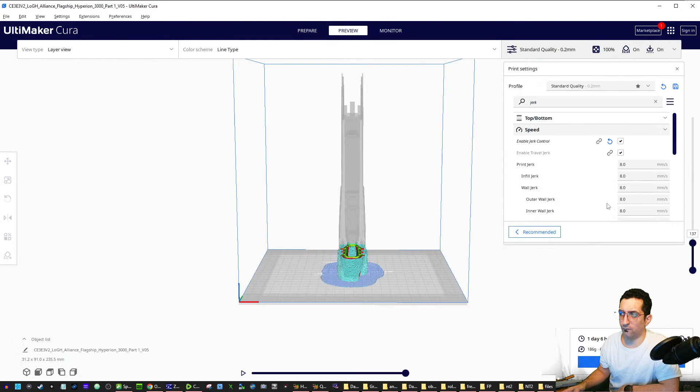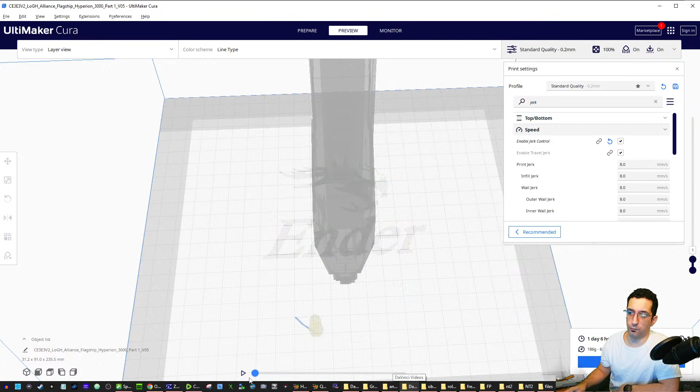So for our very first layer, our printer bed is basically the paper in an old school plotter. You can see it's moving forwards and back on the y-axis. If we zoom in, we see the nozzle, which instead of being a crayon or pencil, is a nozzle with melted material coming out a tiny hole. What's going on is the bed moves away from the nozzle, then towards it as it continues moving right, which is why the nozzle looks like it's going backwards.

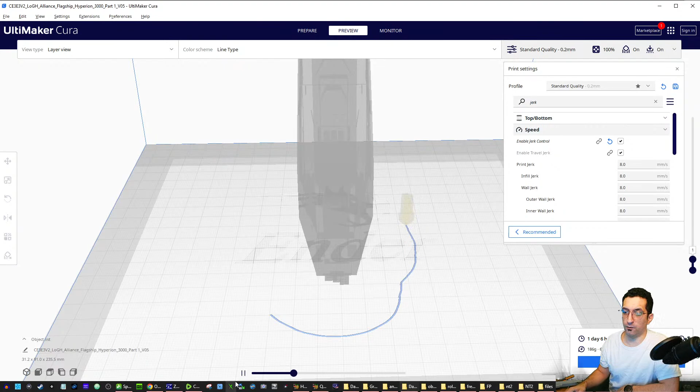That's basically how an old school plotter works. But with 3D printing, it does the whole layer like that. So even now, the nozzle is only moving left or right while the bed moves towards or away from it to create these diagonal lines. Then it does it in successive layers, but each layer is just a two-dimensional drawing for the most part, with sometimes additional data like layer thickness or flow rate. Overall it's like a plotter, which is probably why a crime scene drama in the early 2000s referred to their 3D printer as a Z-plotter, because it's like a plotter with a Z-axis.

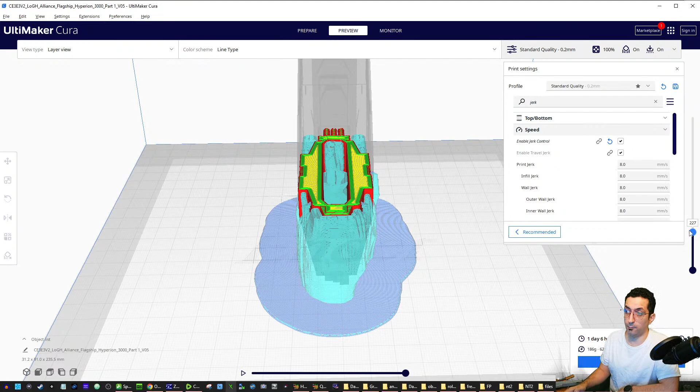Now if this is an FDM printer, we're melting plastic-like material called PLA. PLA is non-toxic, generally speaking. You get pretty much these telltale signs that it's from a 3D printer. This one's not too bad overall in terms of quality, but you can still see some little horizontal lines. Sometimes they'll be more apparent on a failed print.

This one also has a weird internal wall structure, but that's another story. This one was designed inherently hollow, and for some reason the person who designed it created little air gaps between the sections. I'm not sure why they did that, but it seems not to have hurt the model's shape in general.

You can see here I have this weird wavy pattern for some reason, but overall I mostly have pretty clean and almost flat looking straight lines. It's going to be challenged by these bits that stick out here and there, but you could sand them a little bit, do a little cleaning, and that's sort of what I did on the Hyperion right here.

We're not necessarily looking for it to be perfect. Maybe clean up this area over here if I think it's not going to prime nicely. But even in a lot of parts you can just wipe them down to clean them up a little bit. I did a lot of sanding and thorough cleanup here, just to make it a little more presentable, so that when I apply a coat of primer it'll do a better job of covering up issues.

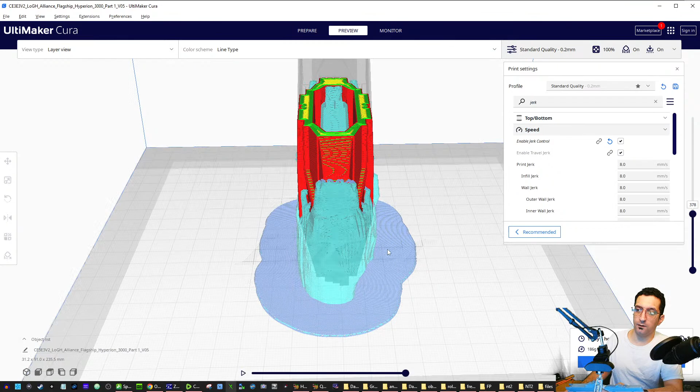But even if you're using normal material like PLA, you've got to level the four corners of that bed. So we see over here, we got four corners, they've got to be leveled. If one corner is too high or too low, you're going to run into problems.

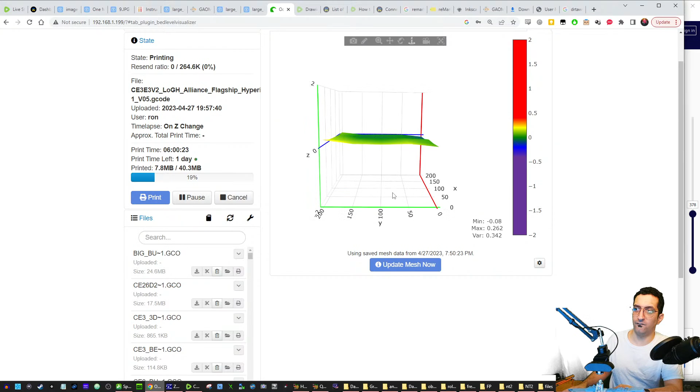The example of that is right here. We got an Octoprint mesh. We have a little sensor probe that can map the corners of the bed in order to help us determine if it's level or not, if it needs any leveling. And so to really make use of that - oh, this is already dry.

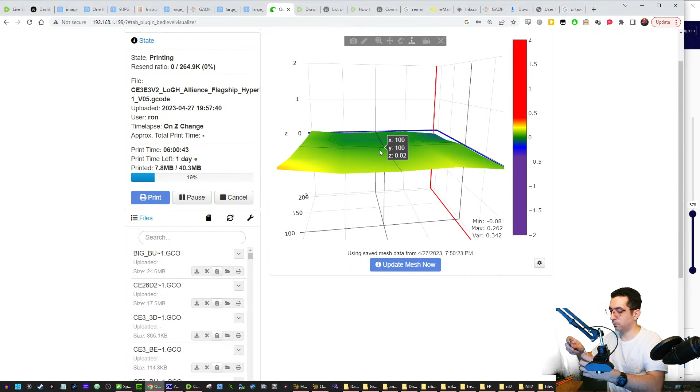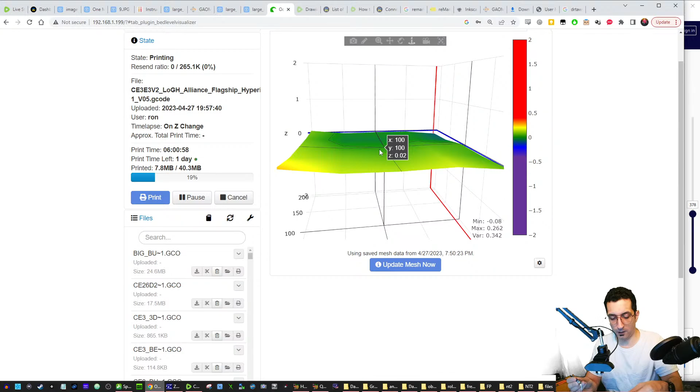So basically my point is if the leveling is off, you're going to have a bad time. Now how do you level the bed? Well, like I said earlier, you loosen or tighten the set screws under the four corners, and you'll be able to basically make it so that the nozzle is always the same distance.

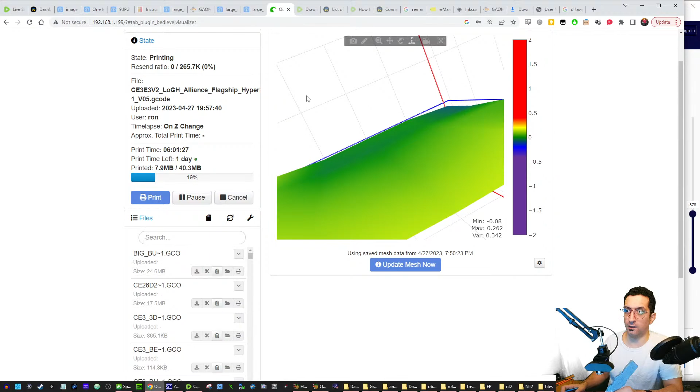That's why I have what looks like a glazing or coating of glass on it. That's actually a glue basically that you spread on it like butter, and that's because some materials are more stubborn about adhesion than others. Printing towards the center of the bed is always easier in my experience, but if you have to print near the corners, or use material that's temperamental even in the center, you're still going to have to have good leveling.

So manual leveling is doable, but having an automatic leveling sensor to help is good. Now, it's not actually leveling the bed automatically - all it's doing is telling the Z-axis nozzle to compensate, saying move up or down a little bit. That's all it's doing. It's not actually fixing the leveling. I wish they had automatic leveling in the true sense of the word, but what they offer is a means of compensating for errors. So you still have to manually level the bed - it doesn't magically level itself, that's the big deal there.

Now, that's an FDM printer. Assuming you're using non-toxic filament, the alternative is a resin printer or a DLP printer, the UV curing process. Basically you have this liquid goo that hardens one layer at a time through the use of a UV light or UV laser, and they tend to build smaller parts, so you get larger parts using the printer I have - I have a Creality Ender 3 version 2. An FDM printer will allow you to do smaller parts - let me correct that.

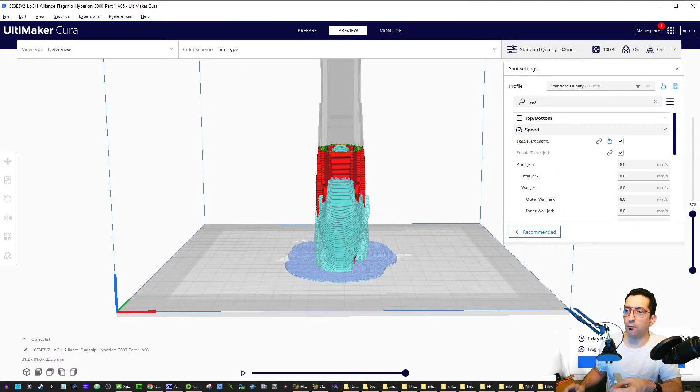It may be a long road between upgrading your printer, testing the upgrades, calibrating things, adjusting things. And of course, it takes many hours to print. Like the print I was looking at on my screen a minute ago — what was that, like 1 day, 6 hours, 51 minutes to do that half of a starship.

Now it's actually more than half of the starship because we're holding the model here, and you can see the front and the back that's on screen right now. It's considerably larger than the front. So yeah, we do have that, so this part will be a quicker print.

In fact, I already have one. If I want to use this one, it's already off the assembly line, and I think the antennas came out looking a little nicer on this one. Now, once again, we're going to be putting brass rods into it.

So even though in 3D printing we want to maybe have that holy grail where everything can get done on one machine, usually if you do a little effort after the fact, things will come out looking nicer. Now, another thing was with this particular model, the printer is capable of doing tiny holes, but this model — for some reason the guy who designed it did a great job on most of it, but these gun ports look a little bit off.

But what I did was I roughed up the grain, so to speak. It's not really wood grain, but I roughed it up a little bit to sort of smooth it out. And I did the same with the center, very carefully, because I didn't want to ruin anything, so I didn't get too aggressive here. I could probably do a little better, but the problem is this piece of paper, or strip sanding stick, doesn't fit quite in there, so I have to be very cognizant about not sanding the wrong part.